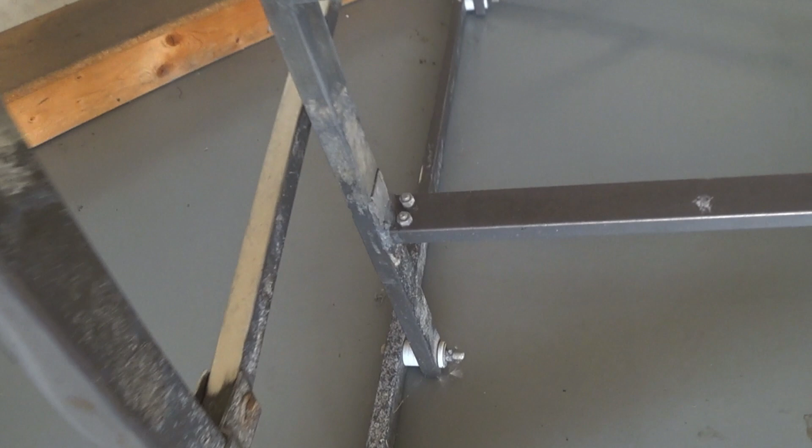Gonna change gears in this video a little bit and talk about this jet ski lift. So this is a jet ski lift that I've had for quite a while, and during a storm, pretty bad storm, part of the lift got broken. And so if we look down here, you can see that outside bracket is gone, and what it should look like,

that bracket down there. And so I have a couple of the brackets here that I took off the other part of the jet ski lift. And this is what I am looking to replace. So that would kind of go like that to capture around the post. And then each of the cross members comes in and captures into the bracket to be held.

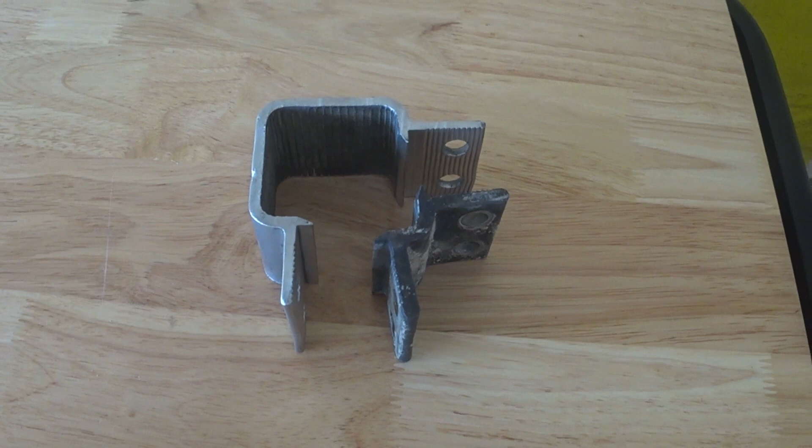And this is an aluminum extrusion that the manufacturer used to make, and they don't make it anymore. The easiest thing would be just to go to some vendor and say I want 2 of these and be done with it. But they don't make it anymore, and so my options are either say the heck with this jet ski lift or figure out how to do it myself.

And as I was going and finding they didn't make these anymore, I thought, what am I going to do? And then I remembered, hey, I've got Fusion 360 and I also know how to design things. So I'm going to make these brackets out of sheet metal parts, and I'm going to use a company down in Wilson, North Carolina called Barnes Metal Crafters. I've known Nick there for quite some time, and so I sent a rough idea for this over to him, and he threw me back a price pretty quick.

And I think he's also going to show us the process of forming these up when I send them down to him. So with that being said, let's hop over into Fusion 360 and see how I can make a set of replacement brackets out of sheet metal instead of aluminum extrusion.

I'm in Fusion 360 and I'm going to get ready to replicate some of the core components of the jet ski lift so we can fabricate the brackets. The first thing I want to do is save my design, so I'm going to go ahead and hit save. I've already created a project called Jet Ski Lift Bracket, so I'm just going to give this design a name called Lift Brackets, and I will hit save. Now we're in an autosave sequence, and Fusion's going to autosave the work that we're doing, so if we crash or make a mistake, we can always go back.

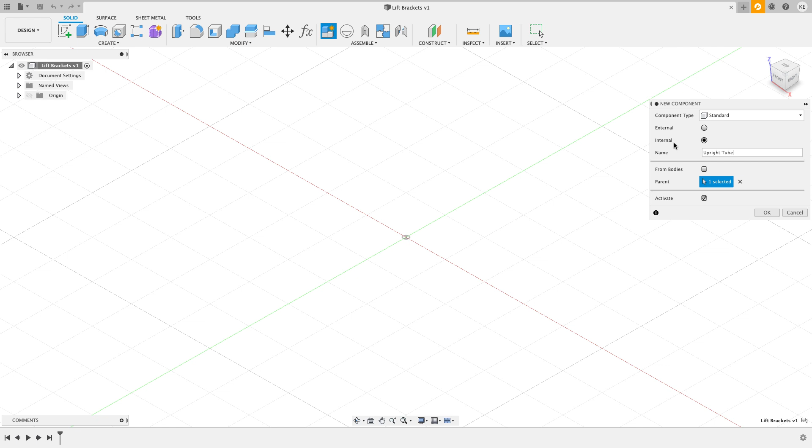hit OK. I don't have any geometry drawn, but I know that this is going to be the core piece of my design, and I don't want this to move around at all. So even though I don't have any geometry, doesn't mean that I can't create a joint. I'm going to go to the Assemble menu, and I'm going to choose an as-built joint between the upright tube component and the origin. And you'll kind of see it shake there. That's letting me know that whatever I draw, it won't be allowed to move. So I'll hit OK.

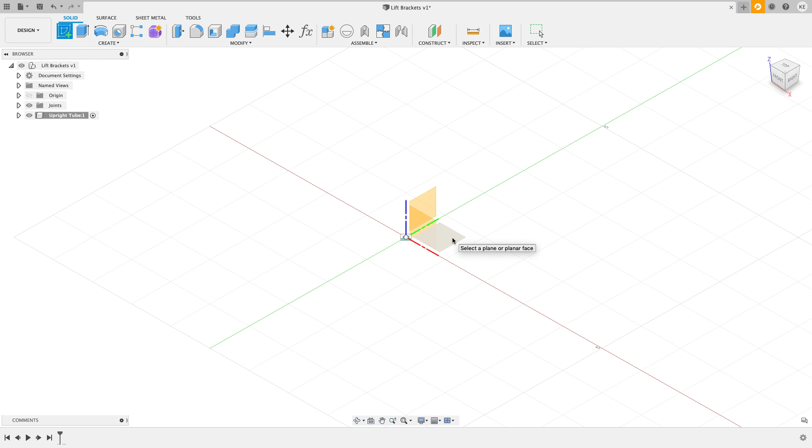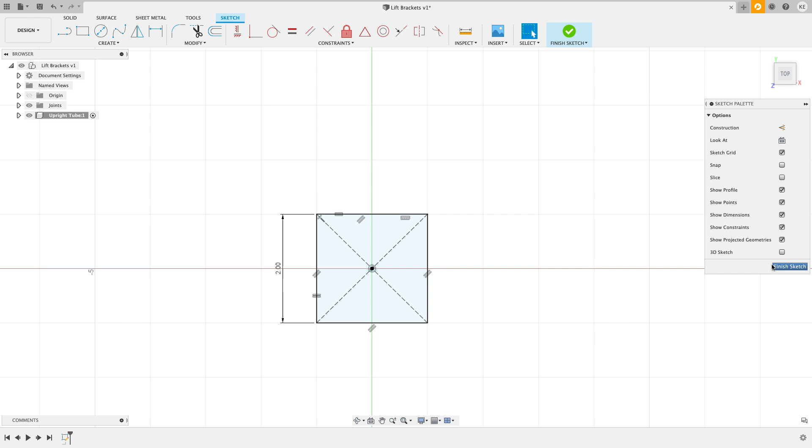And now I want to draw my rectangular tube. So I'm going to create a sketch on the top plane. And from the create menu, I'm going to use the center rectangle option. I'm going to start from the origin. And I know this is going to be 2 by 2, so I could hit tab 2. But instead, I'm going to just dimension one of the sides and then set both sides to be equal. And that will turn it equal, and I'll have a square that's 2 inches by 2 inches. I'm not going to fillet anything or do anything like that.

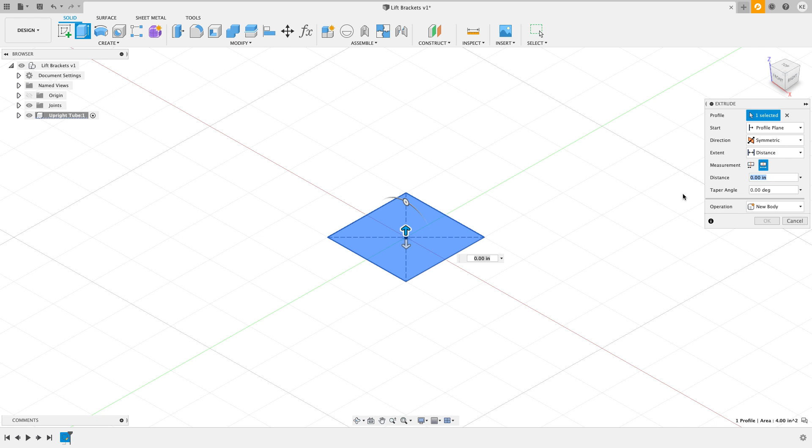I'm just going to go ahead and finish my sketch. And I want to extrude this out. When I extrude this, I could go straight up with it, but I think in my case, it might be easier to go a symmetric direction with it, and you'll see why I might do that as we go. So I'm going to choose symmetric. I want the whole distance, and let's just say this entire chunk is going to be 4 inches in length.

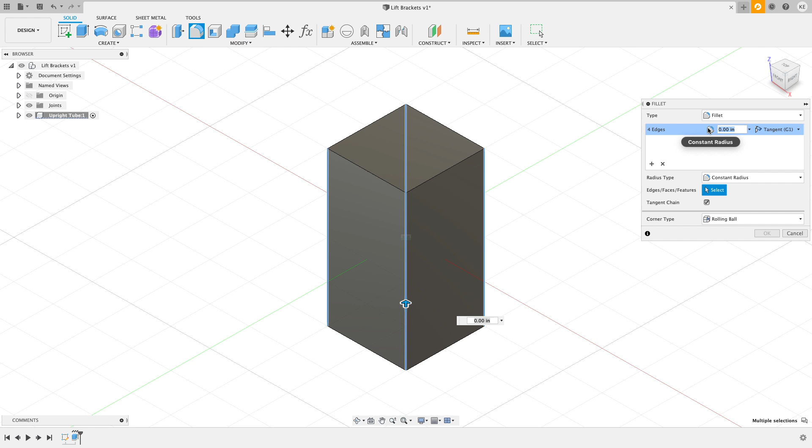And I'll hit OK. I know from measuring that the radius of this tubing is 1/4 inch, so I'm going to fillet those now. So I'm going to go ahead and grab the edges. Notice you can pick the edges through the model if you can kind of get your mouse over the top of them. And I'm going to set that fillet radius to 1/4 inch and hit OK.

And the last step I want to do with this tubing is turn it into tubing by using the shell command. I'm going to click on the top face and the bottom face, and I'm going to give it a thickness of 0.095 inches, and I'll hit OK. And there's my first component that I want to design.

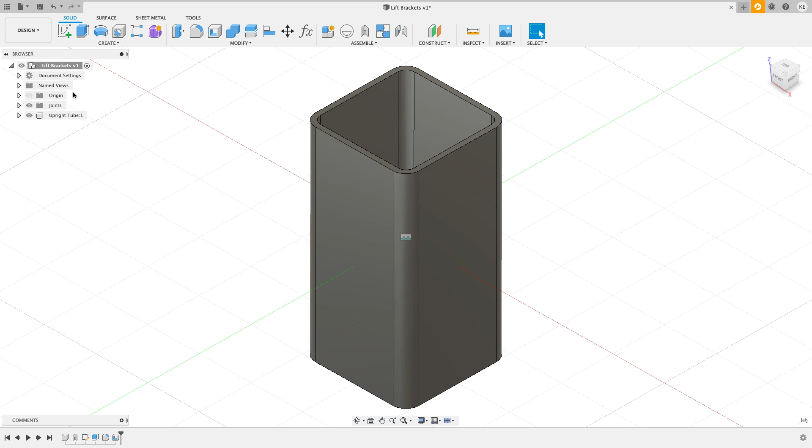If I activate my top level design, I can click on this. I can't move it because an as-built joint has been created between the tube and the origin, so it can't move. I want to create another component, so I'm going to shut off this upright tube for now, and I'm going to say new component. So same thing again, I'm just going to call this a cross tube. Again, this is just going to be a standard component, and I'll hit OK.

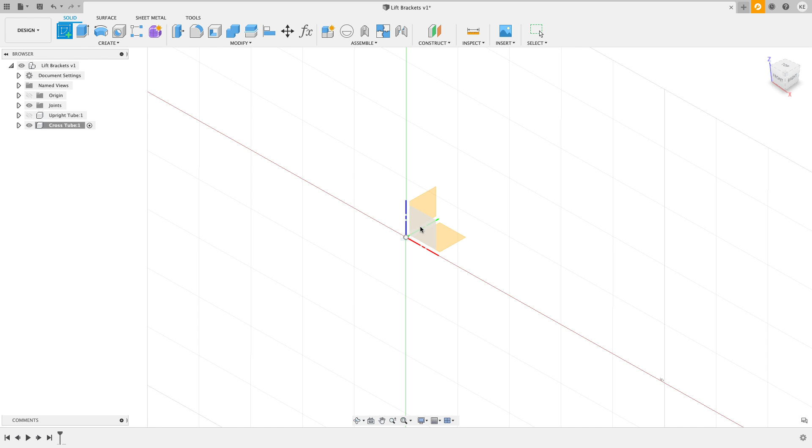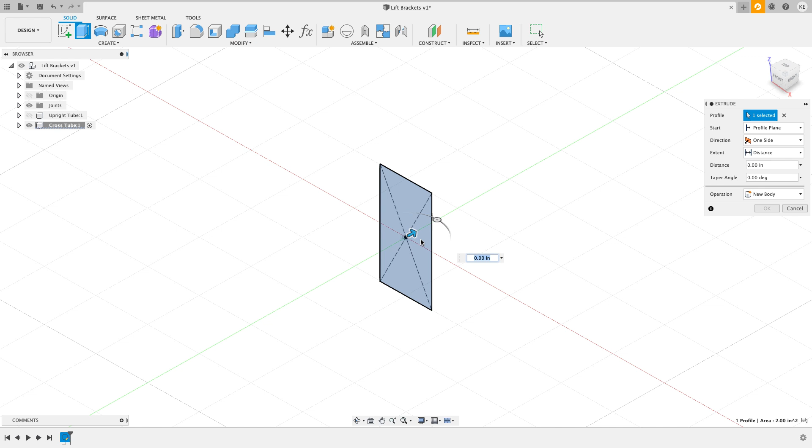And I'm again going to sketch on the origin using the rectangle command again, center rectangle. I'm just going to snap to the origin and drag up and out. In this case, it's going to be 2 inches tall, but only 1 inch wide. And I'll finish that sketch. I don't really know what the radius is on this piece of tubing, and I don't really care. So I'm just gonna extrude this some distance. Let's go 3 inches, should be enough in this case.

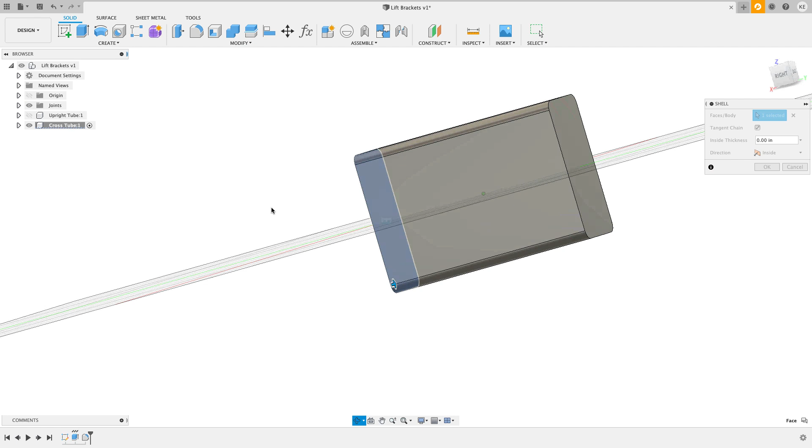And I'm gonna repeat the same process again. I'm gonna fillet the different edges here. And let's use a fillet radius on this one of 0.125. And I'll hit OK. And I'm gonna shell this again. Same thickness, 0.095 as my last piece of tubing, and there's my second piece of tubing there.

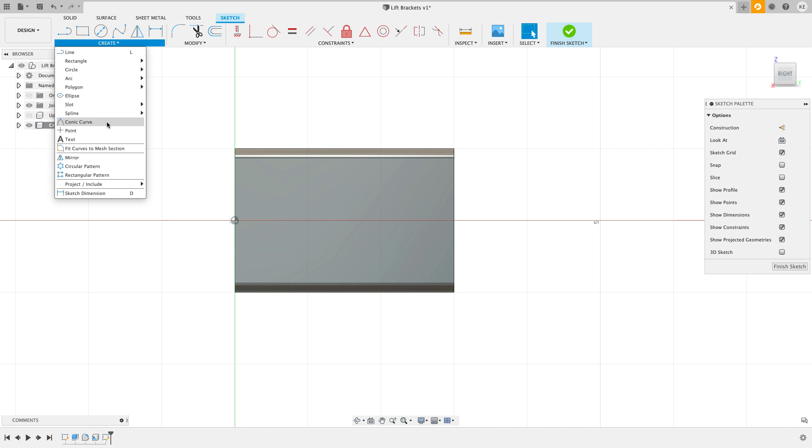Now I also know on this part that there's a couple of holes punched in here, so I'm going to go ahead and put a sketch on that face and sketch in a couple of points. I'm going to drop in a point, if it'll let me grab it, right there, and a point right there. I know that these points are an equal distance away from the center line of the part.

And so I'm going to project in this part's x-axis. So I'm just going to come down here. I guess it's going to be the y-axis, and I'll do it as construction. So I'll click on the y-axis, and I'll hit OK. Now, why did I project in the axis line instead of just drawing a line from the origin? I like to use work geometry whenever I can because you can't delete, change, modify, flip, anything like that with work geometry. So it's a super stable geometry to work from.

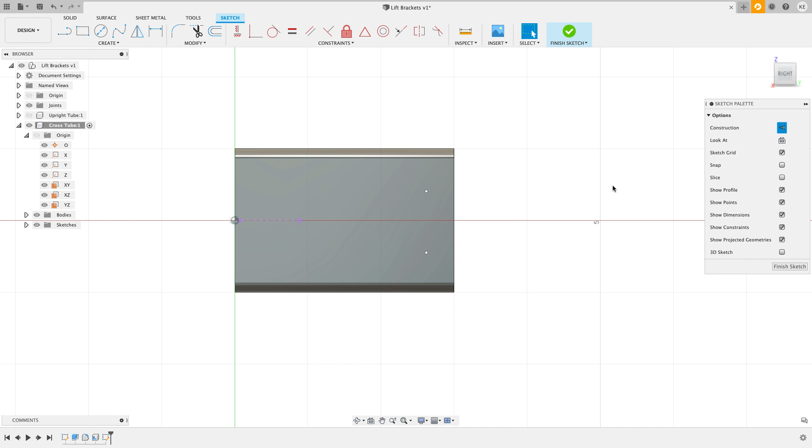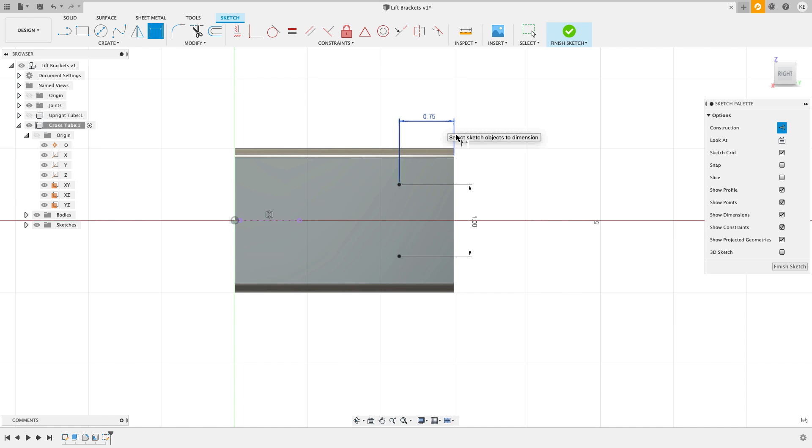Now that I have that in there, I'm going to go ahead and use the symmetry constraint between this point and click on this line. And now you can see that they're lined up and they're an equal distance away from each other. So I'm going to dimension between these 2 points, and I measured this to be 1 inch. And I also know that between the edge and this point, it's going to be 0.75 inches. And I'll hit OK, and I'm going to finish the sketch.

These are through holes that a bolt goes through. So rather than drawing the circle, I'm going to use the hole command. So we'll use hole, click on the point, and for the distance, I'm going to say I want to go all the way through. And now I could just set the clearance size for a 3/8 inch bolt, but I want Fusion to do the heavy lifting for me.

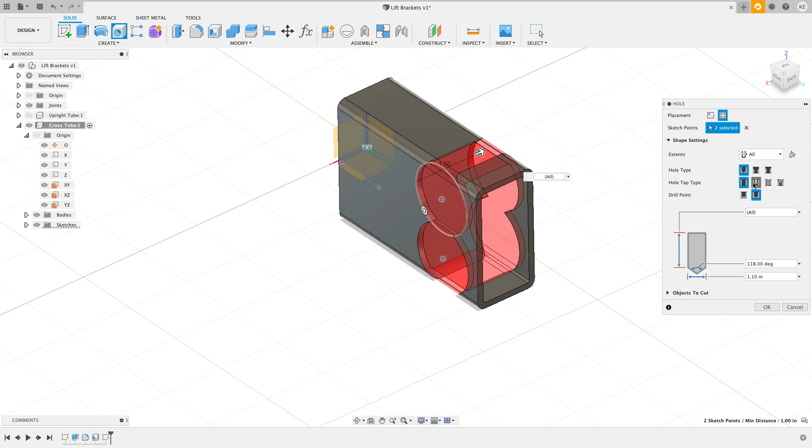So under the hole tap type, I'm going to say that I want a clearance hole, and I'm going to tell Fusion the type of fastener that goes through there. So I'm going to say ANSI unified screw. I'm going to say that this is a hex head bolt, and its nominal diameter is 3/8 of an inch. And when I do that, Fusion figures out what that size is, and I'll hit OK. And now I have my cross member component created.

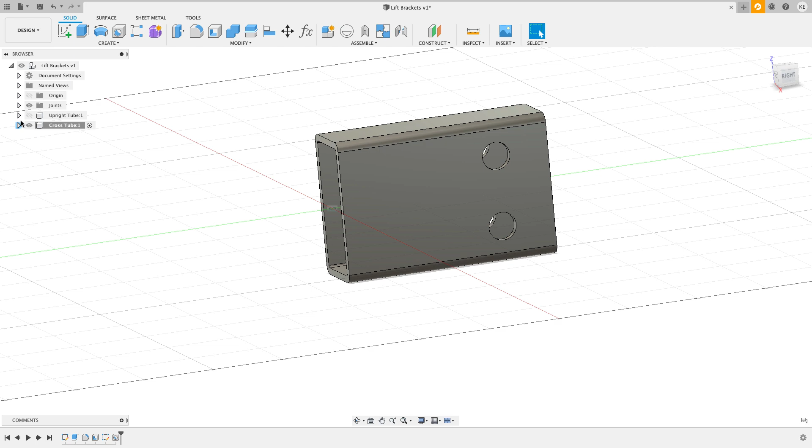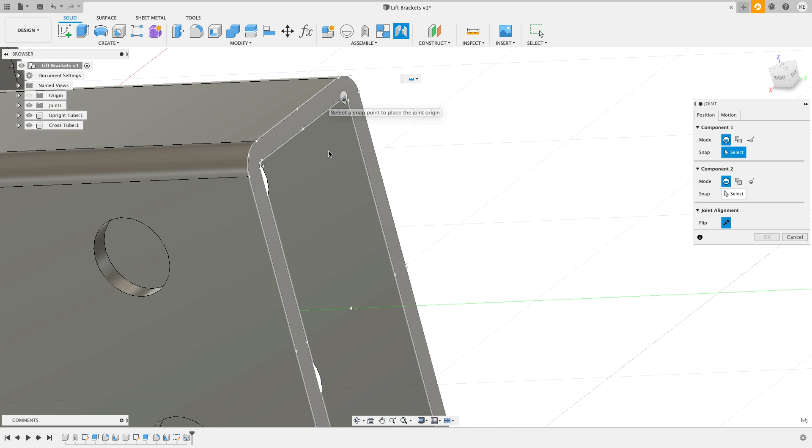I'll turn my upright tube back on, and I guess I'll activate the top level design. And now let's assemble this part. So I'm just going to go and do a joint. I'm going to hover over this face. Now, as I try to get to the center point, you can see when I put my mouse over there, I can see it, but as soon as I try to get there, it goes away. If I hold Control down on Windows or Command down on Mac, it locks those selections in so I can get to it. So I'm going to go choose that option right there, that little center dot, and I want to put that at the center right there. And Fusion's going to put that into place with the rigid joint.

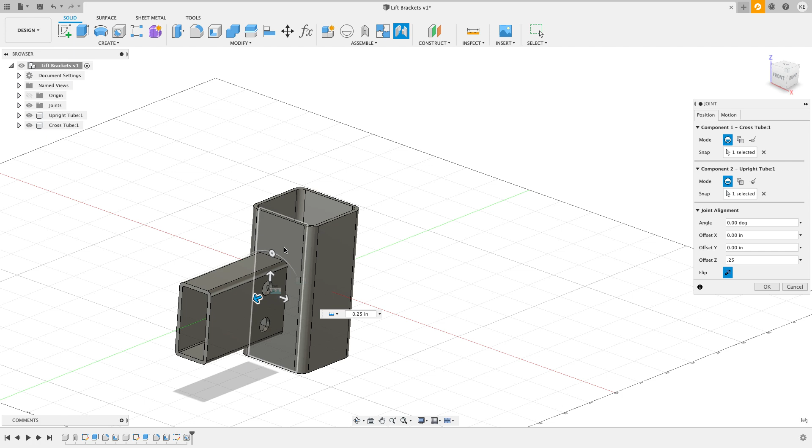However, I want a 1/4 inch gap. The way that this part is designed, the real life jet ski lift, there's about a 1/4 inch gap. So from this front face to the center of those holes is 1 inch. And I'll hit OK. And now I have that aluminum cross member put in place.

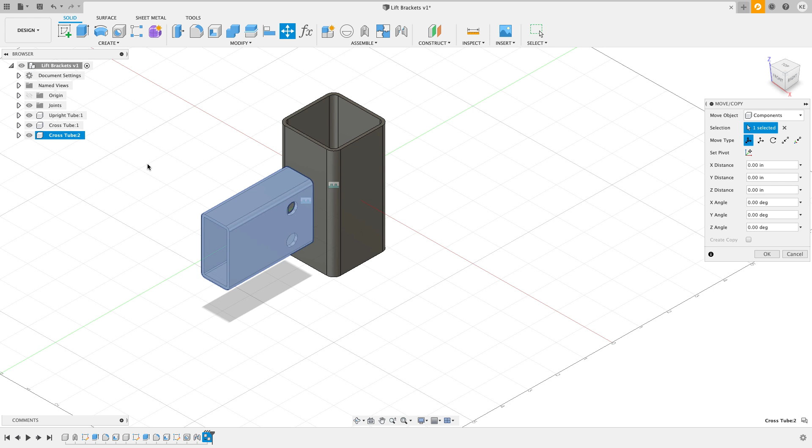I need another one over on this side. So I'm going to right click on this component name and say copy. Right click on my design and then say paste, and it's going to paste a second one in. And I've got some move options. So I'll just kind of move this guy and rotate it back 90 degrees. Wouldn't be necessary. It'll just make my life a little bit easier.

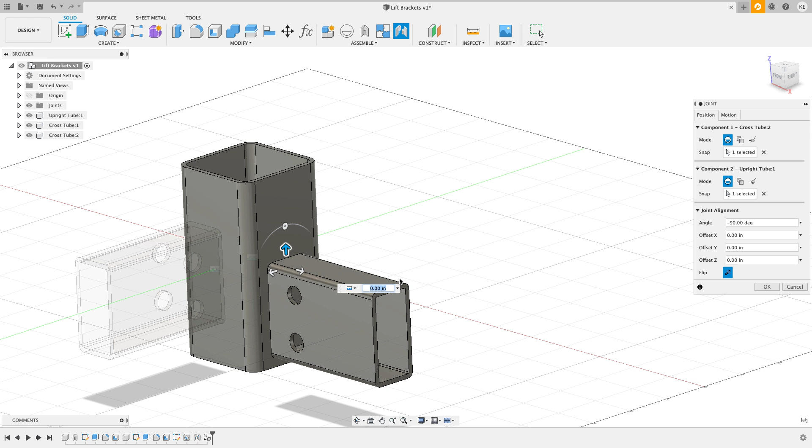And now that I've got that placed, I'll just do a joint, put my mouse on that face, hold the Control or Command button down, and then select that point and align it up with that point right there. And again, I'm going to offset this a 1/4 inch, so 0.25, and hit OK.

So now I've got the structure of my design done for what I need to do. I've got my upright tube, my cross tube 1, and my cross tube 2. So this would match the geometry that's out on the jet ski lift. And I'm ready to go and make my brackets, almost. One thing, sometimes these joint symbols can get a little annoying to look at, so I'll just hit the eye here to shut those off for a minute.

And I know that I want to make some sheet metal components, but I have to make sure that I have the right sheet metal rule in place. So I don't have that rule. I'm gonna go to the sheet metal and go to modify and sheet metal rules. And I'm gonna find a rule that I wanna start with. In this case, I'm gonna use the aluminum inch. I'm gonna right click on it and say new rule. And it's gonna start with a copy of the rule that I started from. So I could call this 1/8 inch aluminum, however you wanna name it. I know a popular way to do this is to use gauge thicknesses, things like that.

So for my thickness, this is going to be 0.125. And the K factor, I talked with the company that's going to make this for me, and the K factor that they use for this is going to be 0.33. So I'm going to type in 0.33. And what the K factor is, if I took a piece of flat sheet metal and bent it, there's a plane somewhere between the inside face and the center line where, when you bend the material, that plane neither compresses nor stretches. It's the neutral line. So the ratio between those two is the K factor. This is what allows you to fold up sheet metal and get a very accurate result.

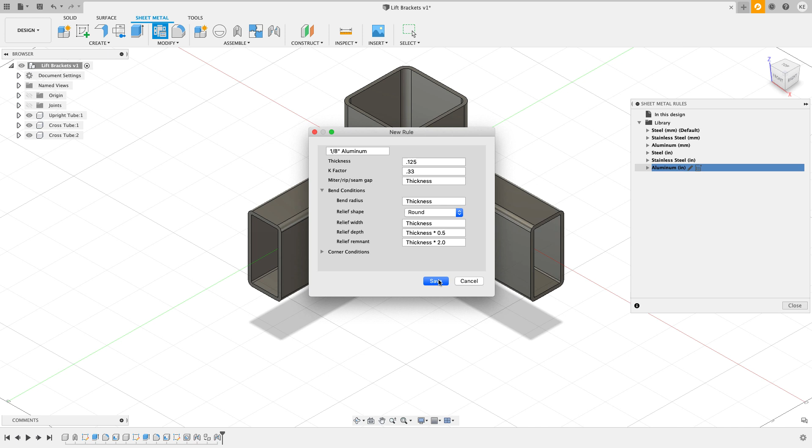So in this case, my rule is now good to go for what I want to do. So I'm going to save that rule. Now you see in my list of sheet metal rules, I've got 1/8 inch aluminum. So I'm going to go ahead and close this.

Now what I want to do is make my outer bracket. So I'll right click and say new component. And this time Fusion's picked up that I want a sheet metal component because I'm on the sheet metal tab. Otherwise I would just hit the drop down and choose what I want. And I'm going to say that I want to use that 1/8 inch aluminum rule for this. And I'm going to rename this component to be outer bracket.

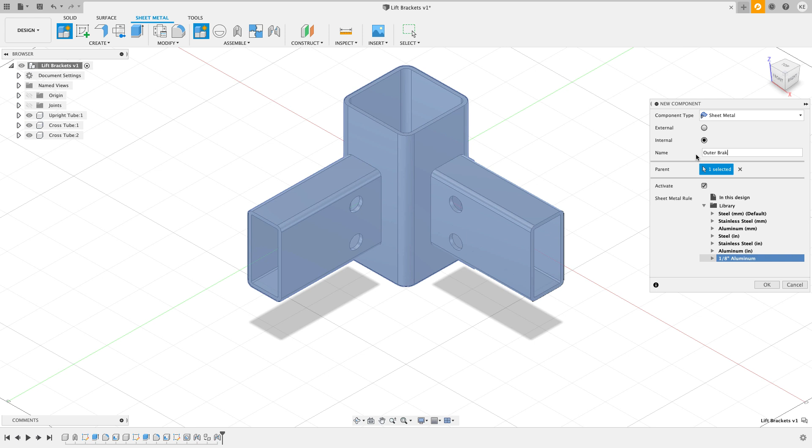And hit OK. And now you can see that all my parts ghost out and I'm working in the outer bracket. To design this bracket, I'm going to use a modeling technique called top-down modeling, where I'm going to use the geometry that's existing on the screen to design the geometry around my part.

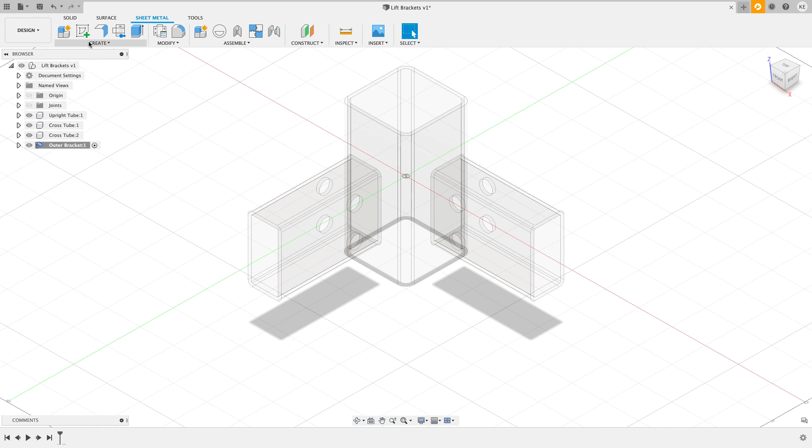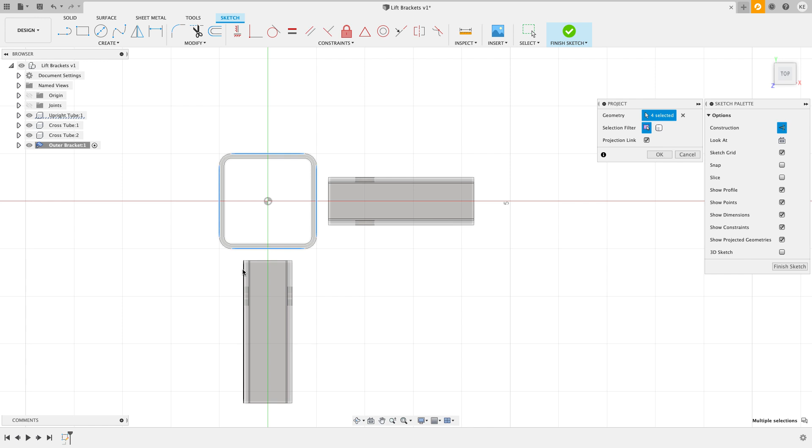So I want to create a sketch and I'm going to put it on this top plane up here. And I want to project in some of the edges that I'm going to need to work with. I want to do that as construction, and then I'm going to hit P for project. And I'm going to click on this edge, this edge, this edge, and that edge. I also want to project in that outside edge there and that outside edge right there. And then I'm going to hit OK.

And now I have those edges of my design projected. If I were to shut off some of these, you'll see that we're just projecting in the edges of those members, because I want to use that to design my piece of sheet metal. Now in some of the places I'm going to be exactly on the faces, and then I'm going to put a little bit of a gap in here.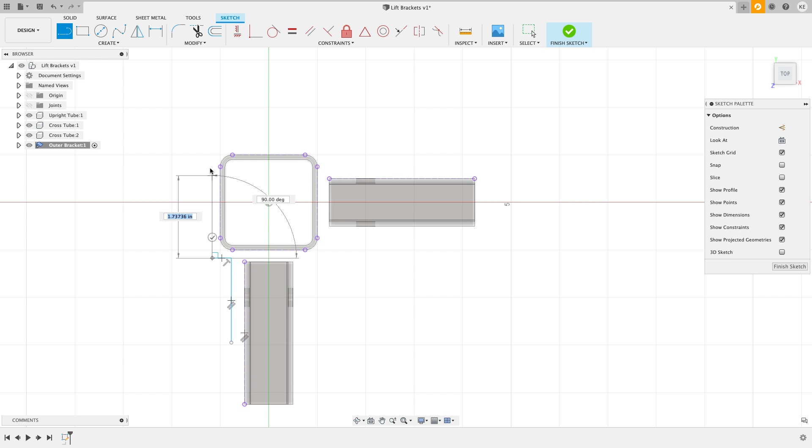So when I draw my sheet metal profile, I'm going to turn my construction off, and then I'm just going to come down here and draw like this and come up and come over. I'm not being super careful right now, and I'll come down and come across. So there is going to be my sheet metal design. I know that this leg and this leg are going to be equal at some point.

And I can also add some other constraints. I'm going to use a collinear constraint between here and this line, and between here and this projected line. So that sets me up that way. I'm also going to do it for here and here, and for here and here.

Now for the legs that are just kind of hanging out in space, I want to leave a little bit of a gap in case everything doesn't line up exactly. As long as I can get a bolt through it, I can tighten everything down and get it to squish in. So I'm going to do a dimension between this edge and this edge, and I'm going to set that gap to be 0.0625 or 1/16 of an inch. And then I'm going to set the same gap over here.

Instead of typing that in, I'm going to reference in this first dimension. And probably what would have been a smarter thing for me to do would have been to create a design parameter called gap that I could have referred both of these dimensions to and changed it from the Modify, Change Parameters menu. But this is a pretty simple design, so this will work.

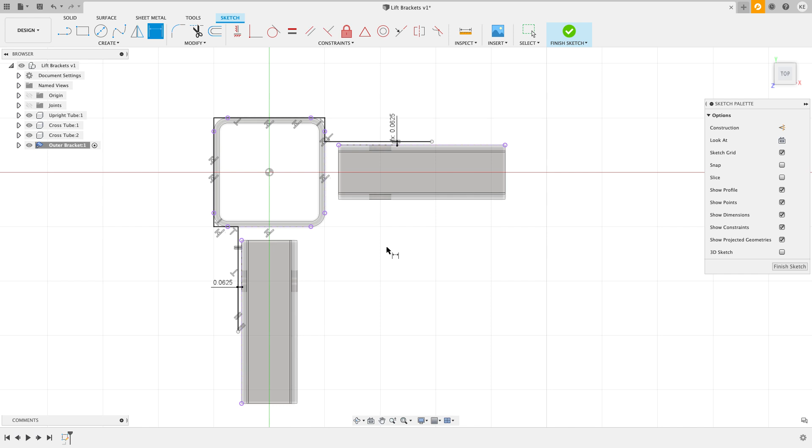I'm almost all black and fully constrained, but the only thing left is I'll set this dimension to be, let's go 1.5 inches for this length. And so now everything turns black and is fully defined. And now it's time to turn this into a sheet metal component.

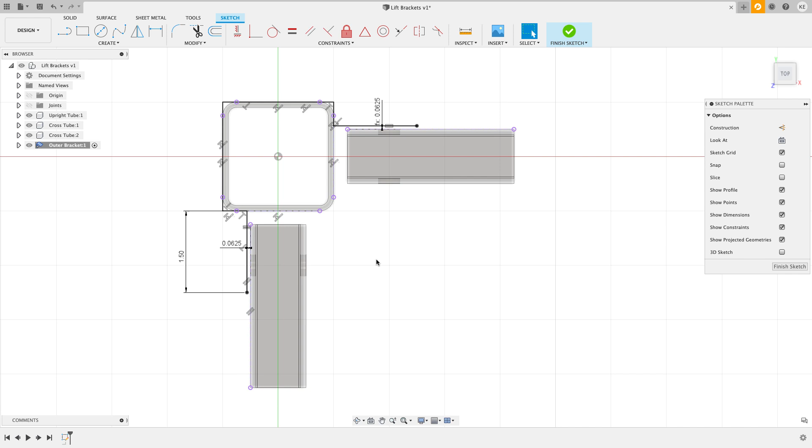So I'm going to finish my sketch, and then I'm going to use the flange command and click on this edge. Now I'm not going to see anything happen until I give it a thickness. And when I give it a thickness, I'll see that it starts to show my sheet metal thickness. And with this, I want to make sure that my design stays on the outside of the line. I also have the ability to go on the inside or to split the line using symmetric.

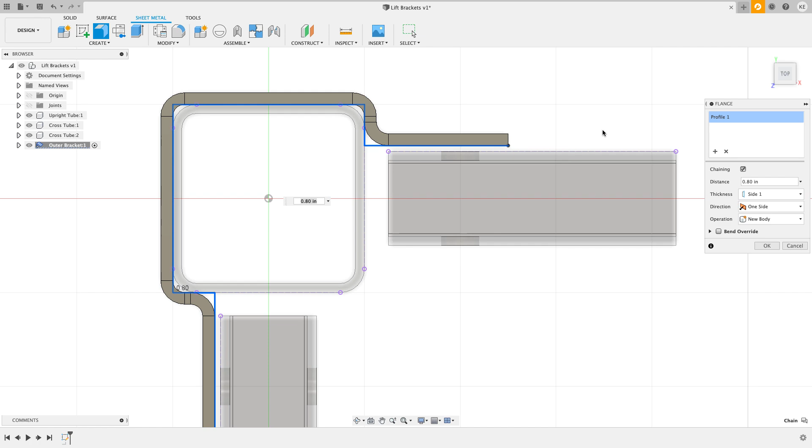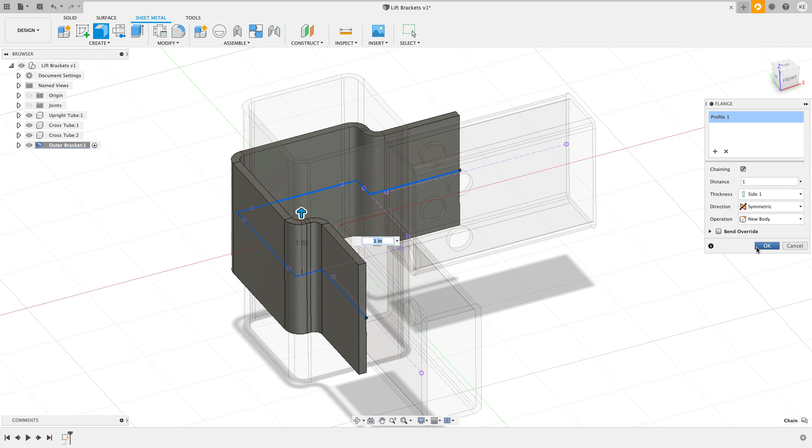I want to go to side 1 so that my design is on the outside of the tubes I'm working with. I'm also going to do this symmetrically. Right now it's going one direction, so I'll say symmetric. Things work a bit differently in sheet metal currently—instead of entering the half or whole width, the only option is the whole width. I'll enter 1 inch, which gives me a 1-inch overall height. That's good, so I'll say okay.

And there is my sheet metal outer bracket, the main part of it. I have some holes that I need to punch through here, so let's go ahead and make those.

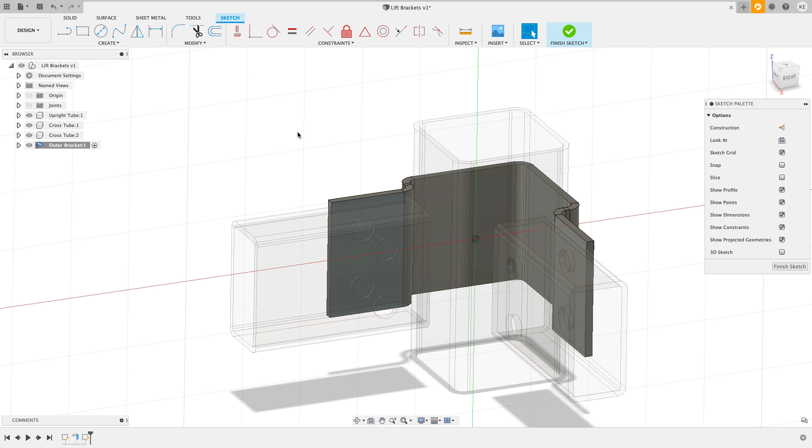I'm going to put a sketch on this face, and I already have the hole locations, so instead of redoing those, I'll turn on construction and hit P for project. I can project in that edge and that edge of the circle, then choose okay. Now that I have that done, I could even shut off my cross tubes—I don't need to see those anymore.

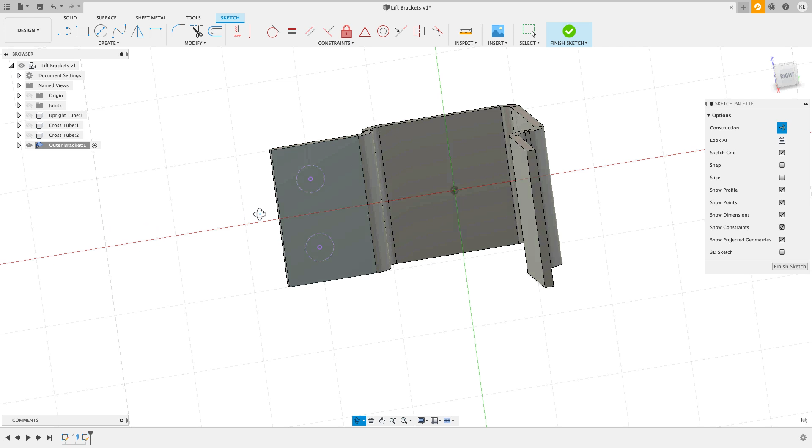I can shut off my upright tube too if I wanted to, because now I'm just going to draw in a slot shape. I'll turn my construction back off, and now I want to do a center point slot. I'll lock it to that origin spot, drag it out a little bit, and drag this up.

Now, I don't know exactly how tall I want to make this. I want it as tall as the circle is, so I can use the coincident constraint to go from here to the circle. I'll have to use tangent on this one, from this line to the circle, and then set my total overall distance.

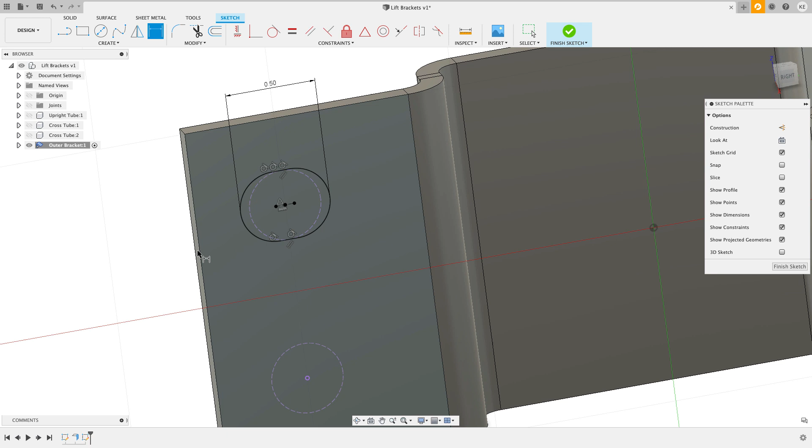I want to dimension the outside to outside of this, so I'll right click and say pick circle arctangent, click on that quadrant and come up here, and let's call this maybe 0.5 inches. That's probably enough—I just want a little slop in here in case the hole isn't perfect or the bends aren't perfect, so I can get that lined up.

I could either pattern this down as a solid, or I'm just going to draw this over again. Oftentimes I like to do a pattern or a mirror, but in this case I'll just draw it one more time—another center point slot, dragging this out and up.

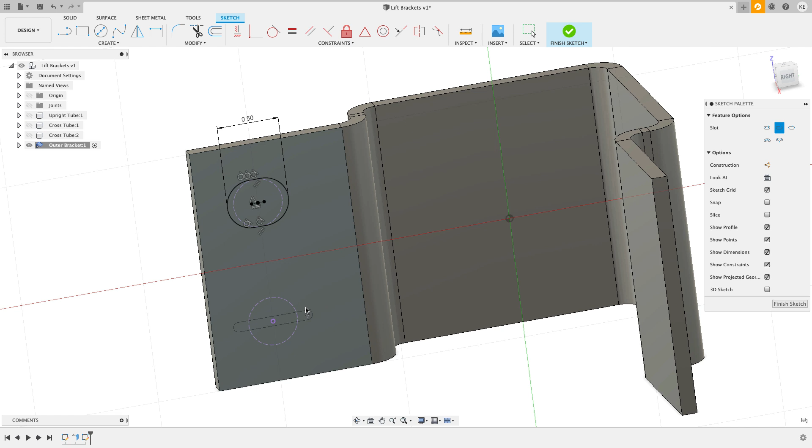Now I don't really even have to dimension anything—I'm going to use constraints for all the rest of this. I'll say equal between here, and then equal between this edge, and that should make these both the exact same size.

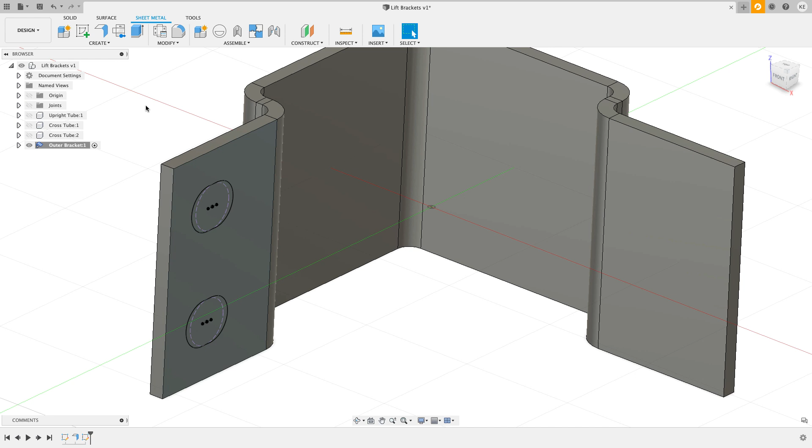I'll finish my sketch, and then I can extrude that region and that region. I'll choose the direction I want it to go, and for the distance, I know I always want these to go all the way through, so I'll hit OK.

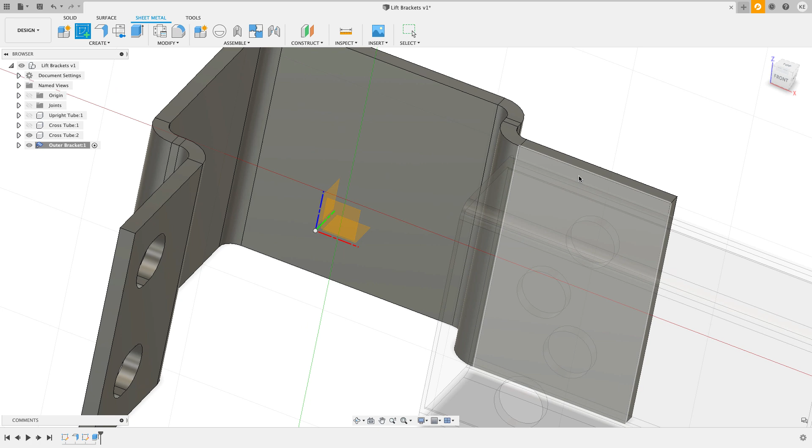Now I need to get those same holes over on that side of those slots, so I'll turn on that upright tube and put a sketch on that face. I'll hit P for project as construction, just like before. Click on the 2 holes—I missed the second one. Click on that edge and hit OK.

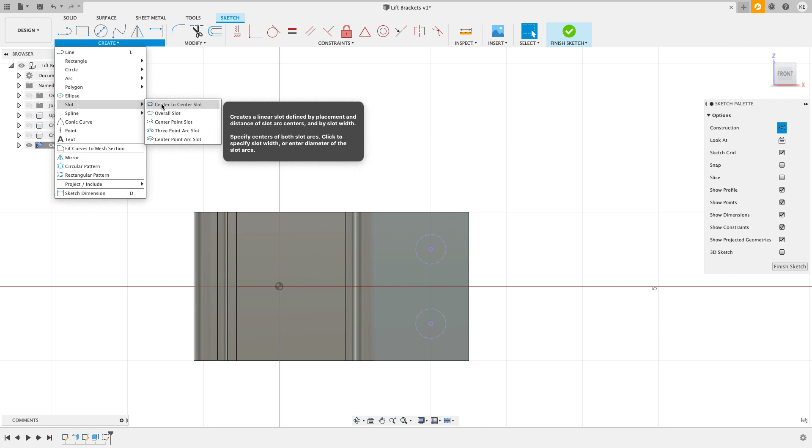Now I can shut off that tube, and we'll just go ahead and sketch it one more time—slot, center to center slot. If I would have paid attention to the dimension, I want to make sure I'm not on construction. I could have just referenced that last dimension that I used, but I did the wrong one there.

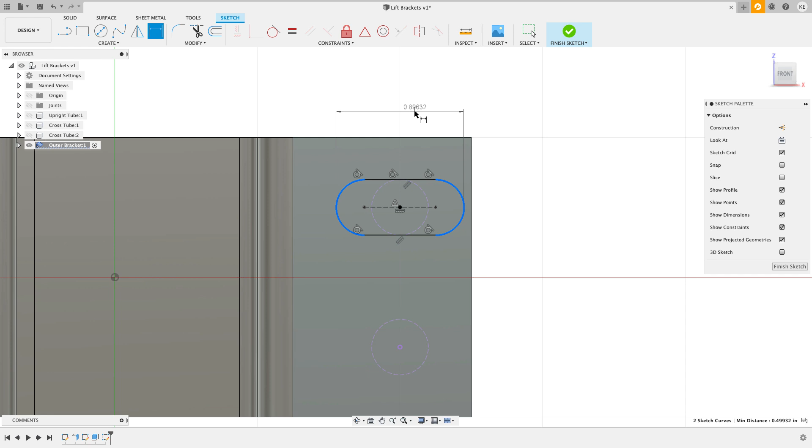So I'm going to come back to slot, center point slot, click on the center, drag out, drag that up, and say tangent between that and that. Then from the quadrant to the quadrant, again, is going to be 0.5 inches. One last slot to go.

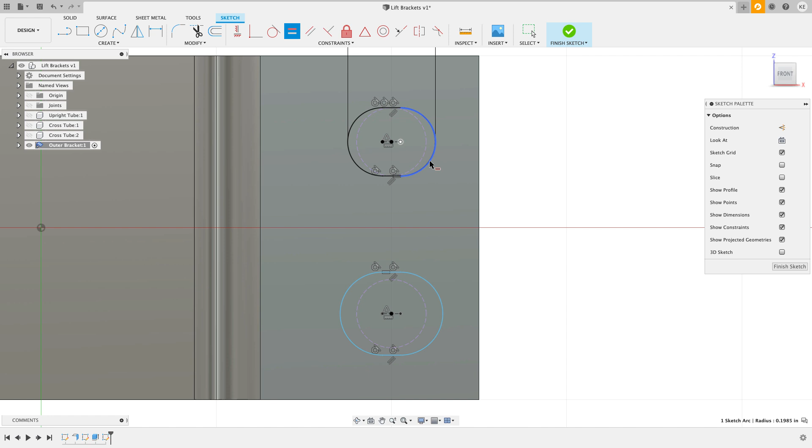From the center point slot, come out and come up. On this one we can use the equal constraint between those two edges, and then from this arc and that arc, that'll make my circles the same. I'll finish my sketch, and now I'm going to extrude out this region and this region, pulling my arrow the way I want it to go.

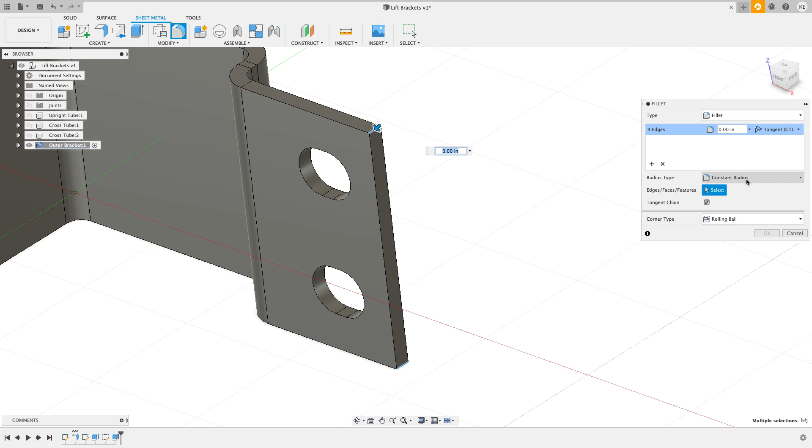For my distance, I'm going to say all, hit OK. The last thing I want to do on this bracket is add some fillets. So I'll use the fillet command and click on that edge right there, and that edge right there. For the fillet radius, I'll give this a quarter inch radius just to round it over decently.

I'll hit OK. Now if I turn on my other components, you'll see that sheet metal bracket fits exactly around it. All the holes line up. I've got a little bit of slop factor there to make sure I can get my bolt through. So I'm pretty happy with that.

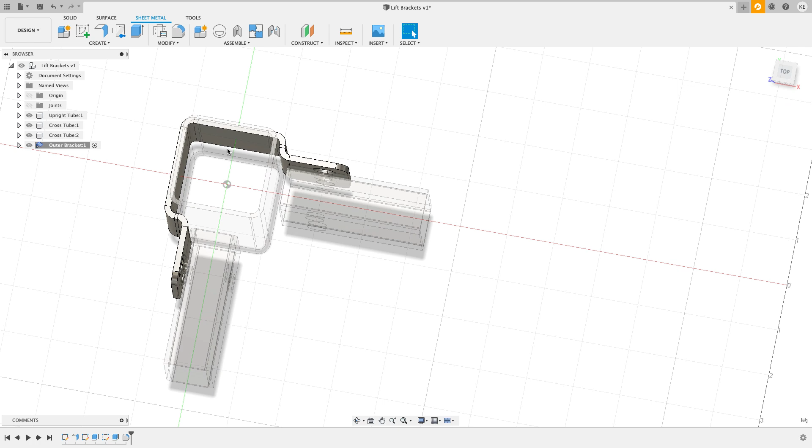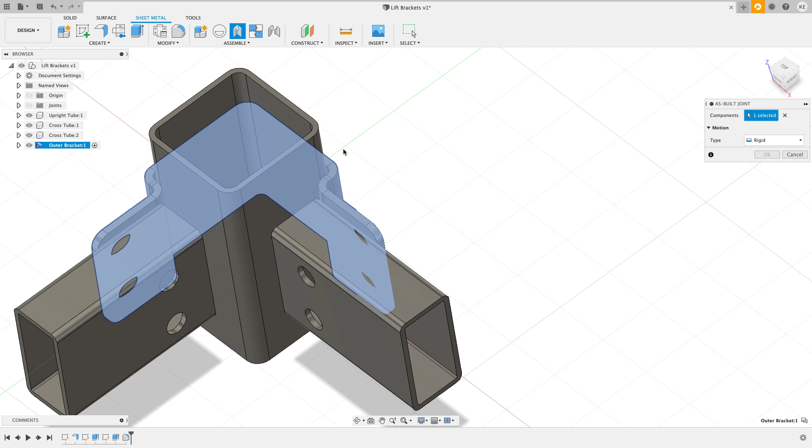If I'm not careful though, one thing I haven't done is I can click on this bracket and move it anywhere I want it to go. It's in place right where I want it to be. So rather than adding a joint, I'm going to do an as-built joint because it's located right where I want it to be. I'll choose as-built joint between the bracket, and I can pretty much choose any component I want.

I'll use the upright tube in this case, and it's going to be a rigid joint, and now I can't move that around anywhere. I can activate my top level design, and there we can see I've got my outside bracket ready to go. A little bit of a gap there.

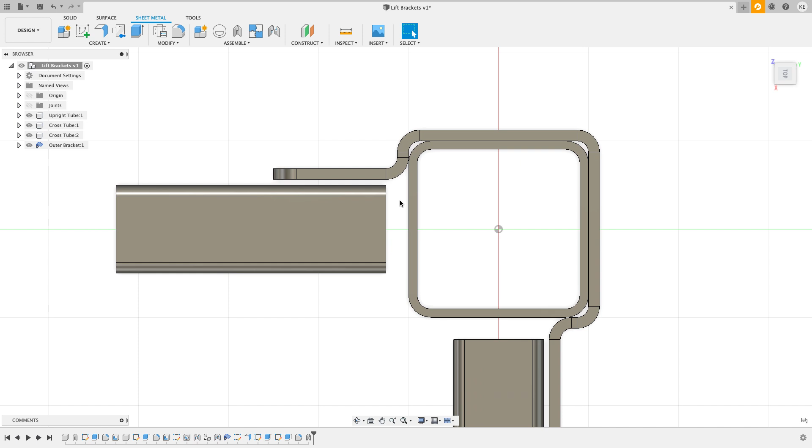Sometimes in CAD things look a lot bigger than they are. That's only a 1/16 of an inch, so it's not really that big of a gap. We can repeat the process to do the inner bracket.

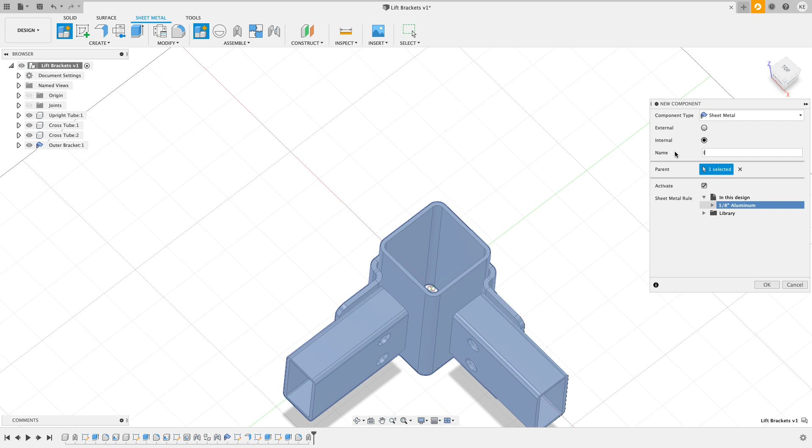So I'm going to right click and say new component. It's going to be sheet metal. It's already chosen the design rule that I've used in this design. I'll call this inner bracket, and I'll hit OK. Then we'll just repeat the process again.

So I'm going to put a sketch up on this top plane, and I'm going to do P for project. I need to project in some geometry. I'm going to project in this edge and this edge this time, and I want this outer edge and that outer edge. I can hit OK.

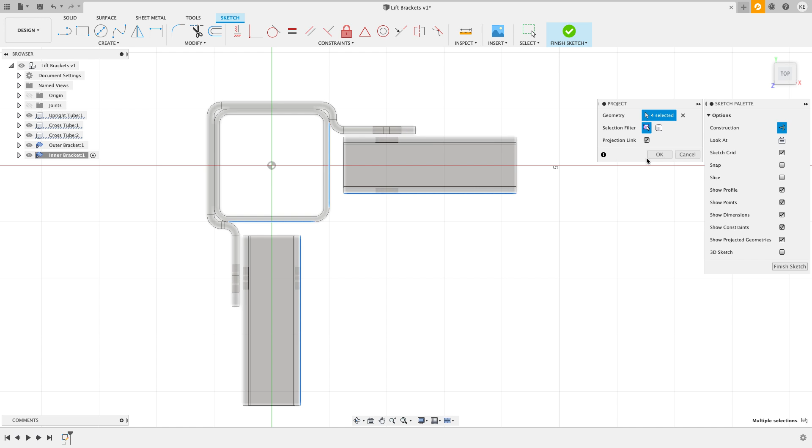I'm going to turn my projection off, and now it's just going to be the same thing. So I'm going to draw a line up, over, up, and over. I don't know how long this is. I could dimension it, but I know I want it to be as long as the other bracket. So I should have projected in a couple more things.

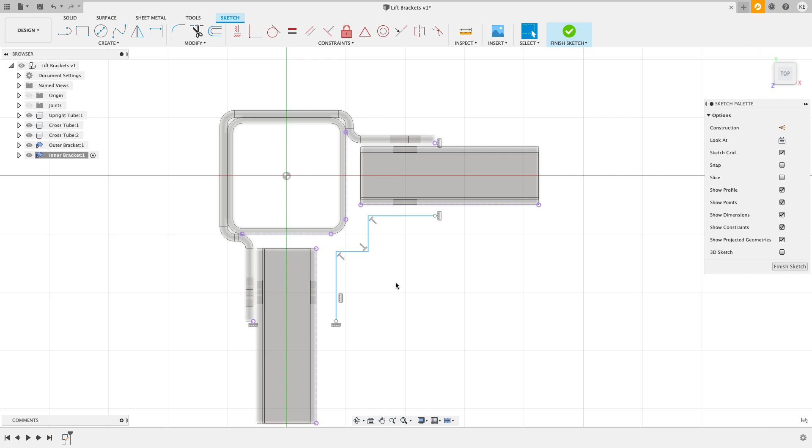I'm going to do P for project one more time. I'm going to click on that endpoint, and I'm going to click on that endpoint right there and hit OK. Now I know the length is going to be vertically located between that endpoint and horizontally located between those two endpoints. Now I've got that set.

I'm going to give this a collinear constraint, I should say, between there and there, and we'll say that those two are collinear. Then now I'm just going to go and dimension this. Again, if I would have made a master parameter, it would have been easier on myself, 0.0625 to get my gap dimension. And I'll dimension from there to there.

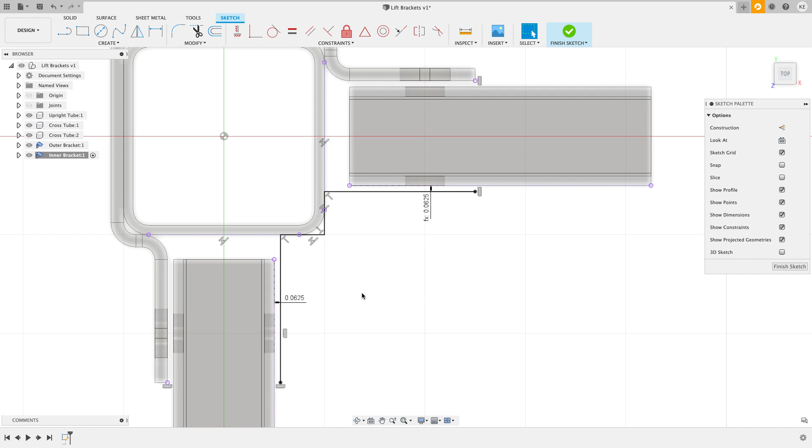And I'll set that equal to the first one. Now you see that my inner bracket is good to go. So I'm going to finish my sketch, and now I can use my flange command.

Let's pull this up to make sure that fusion is on the right side of the design in this case. And you can see it is not, it's cutting into my tube. So I need side 2, so that looks good.

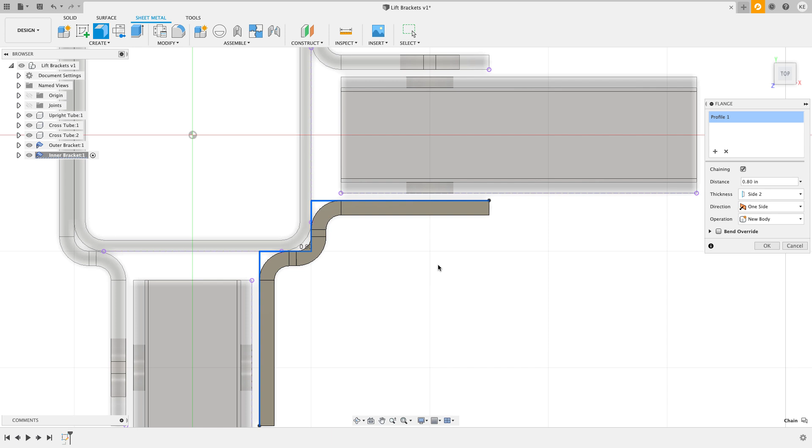And I'm going to say symmetric, and again, it's going to be 1 inch to be the same height. Now I could have extruded to the other face - lots of different ways I could have made that bracket right there. So I'm going to go ahead and hit OK.

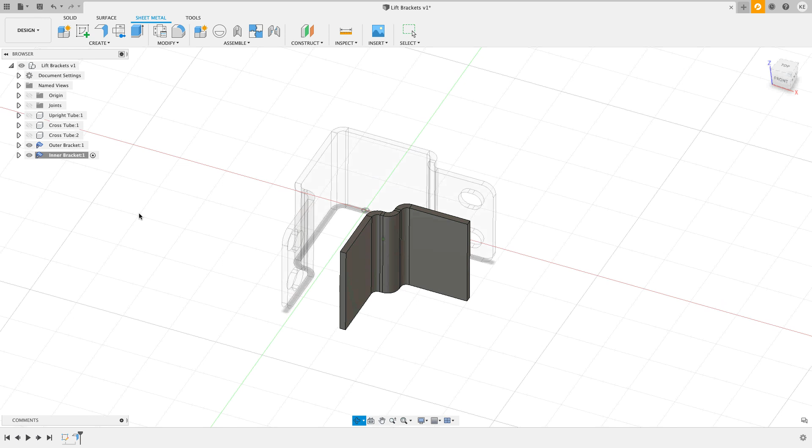I'm going to turn off these other components. Now what I can do is I can reference the other slots on the bracket. So I'm going to create a sketch on this face, and now I'm going to do P for project. I'm just going to click on the different edges that I want to participate in this slot.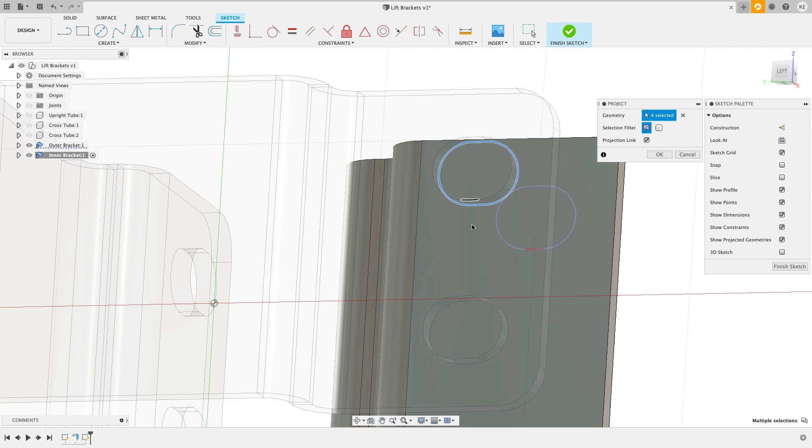So it really wouldn't matter which edges I'm using here. So there's one of the slots I want, and then here I'll just go grab those four. I'll hit OK and finish my sketch.

Now I'm going to extrude that region and that region. Pull it through. The distance is going to be all. And hit OK, and there's that.

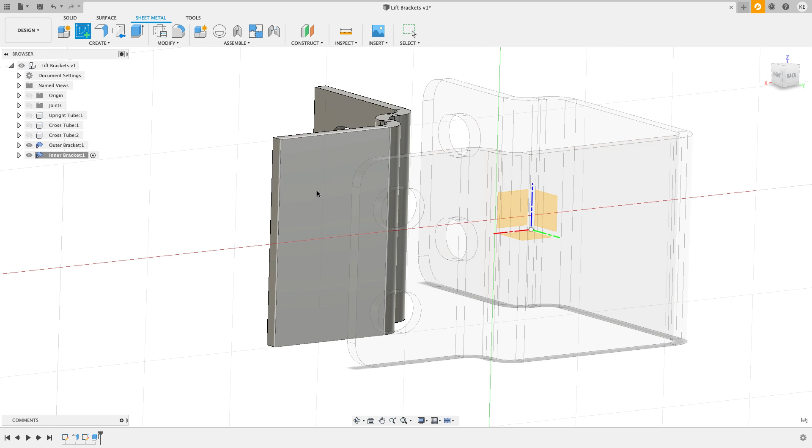Now let's go and put a sketch on this face, and again we're going to do P for project. I'm going to click just the geometry that I want to project and hit OK there, and I'll do P for project one more time. I could have done them all in one shot, but I split it up into two, and I'll hit OK.

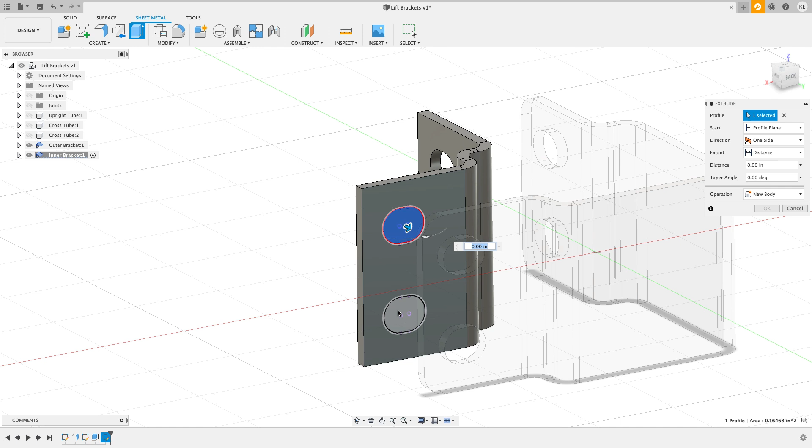Rotate around a little bit. I can finish my sketch and do my extrude and click on this face and this face, pull it through a distance of all, and I'll hit OK.

Last thing I'm going to do is just do the fillet command. Click on wrong edge, so I'm just going to X that edge out, grab that edge, and that edge, and I want that top edge, and I'm just going to rotate around and grab this last edge and hit 0.25, and that's all filleted out.

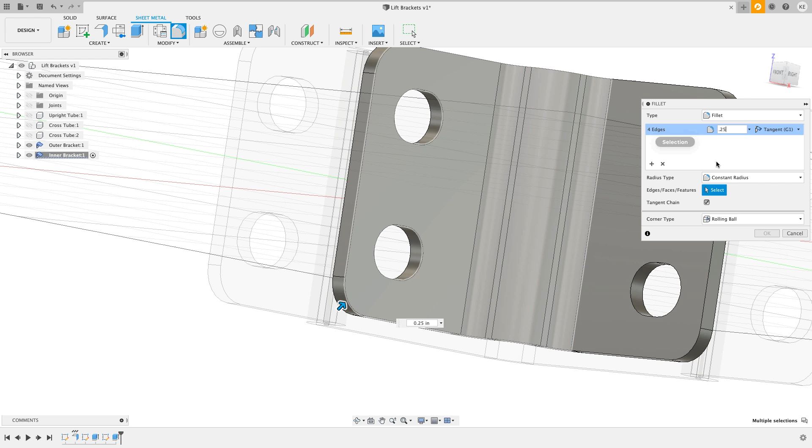I'm going to turn on the visibility of my other components, and the last thing I'm going to do as far as design goes is to lock this thing in place.

I'm going to revert it back. I'm going to do an as-built joint between that bracket and the tube right there, and I'll hit OK.

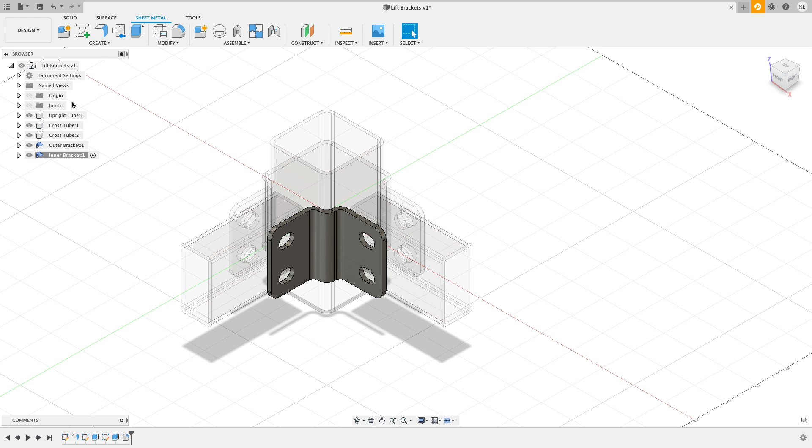Now everything in my design, let me grab the top, nothing will move. Everything is good to go.

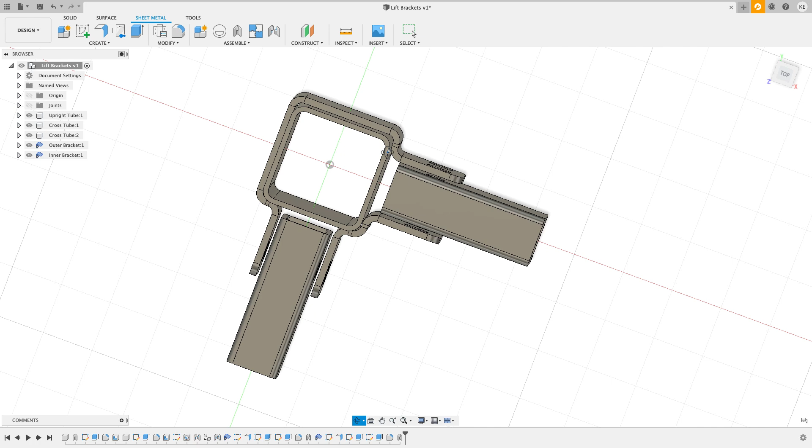So that is designing the inside and outside brackets. You can see I've got roughly a total of 1/8 of an inch of gap on both sides when it's all said and done. That should be more than enough for this design that I need to do. When I put the bolts through and tighten this down, this is going to suck everything into place, so that will be good.

If I wanted to look at my flat patterns, I can activate this part. I'm going to right click on it and say isolate so we just see it. Expand this out, and now I need to create a flat pattern.

So I'm going to choose to create a flat pattern. I'm going to choose that face right there and hit OK, and Fusion's going to flatten that out for me. So that's what the bend lines would look like on this particular part, and I can finish up that flat.

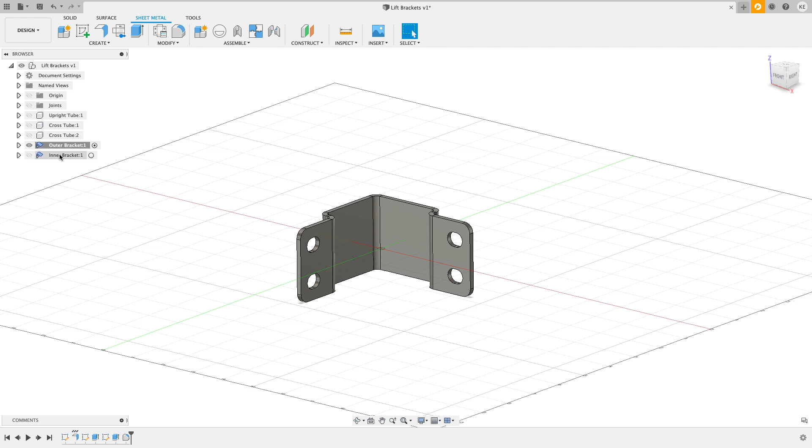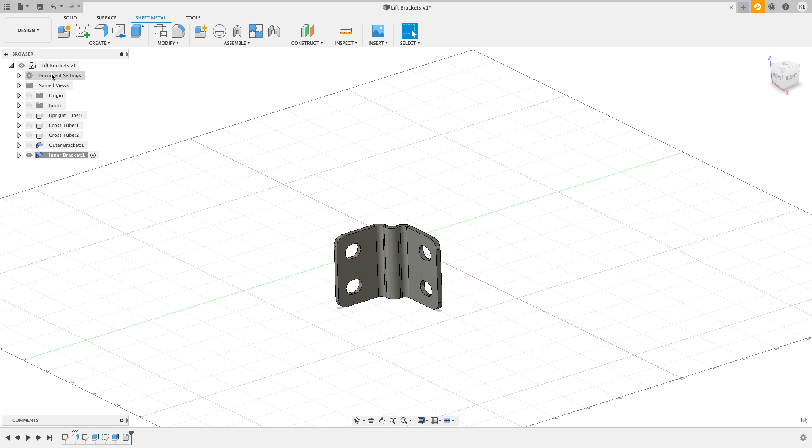Now I'm going to activate the outer part and do the same thing. It doesn't really matter which face we grab here per se - sheet metal rule, I'm sorry. I'm going to click on the flat pattern and click on that face and hit OK, and there's the flat pattern of my other bracket. I'll finish my flat pattern and I can activate my top level design and turn the visibility of everything on.

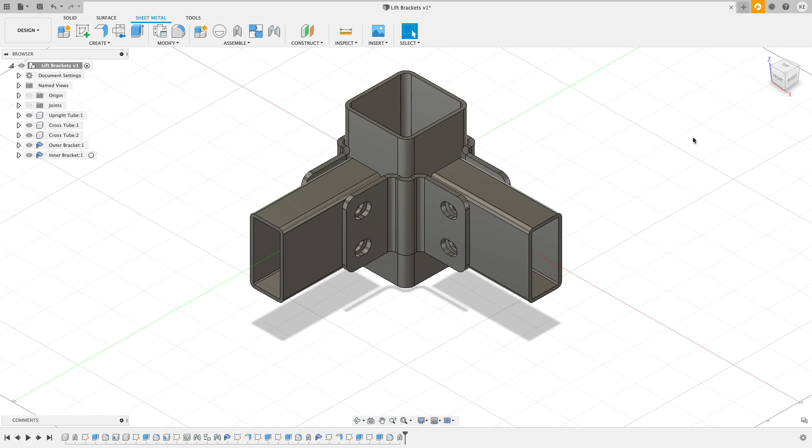Now what I think I'm going to do before I send these out to have these actually fabricated, I want to make sure that they fit. I've got a 3D printer. I'm going to print these two brackets on the 3D printer and see if when I take them out to the jet ski bracket - I'm sorry, the jet ski lift - and put them on, will everything line up and will it all bolt together? Hopefully I'll be back with a little picture or video of that process.

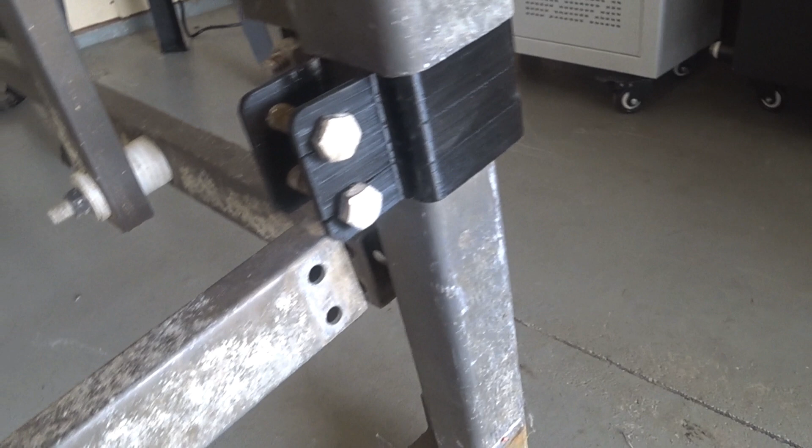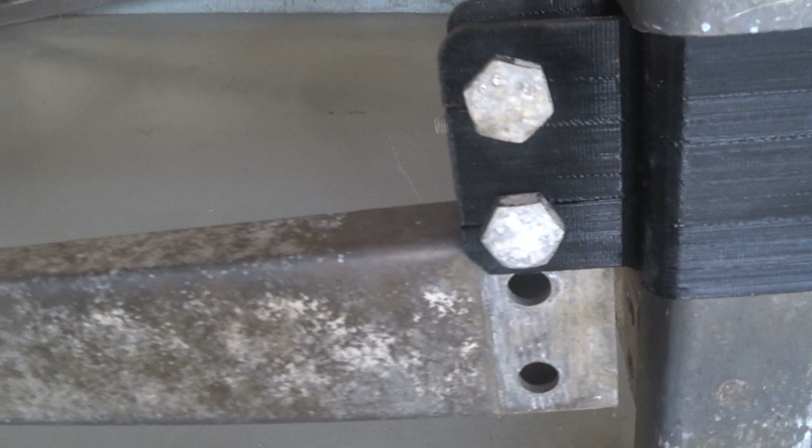Okay, I got the 3D prints made and they're functional enough to test. You might be able to see I broke it a little bit trying to connect this bar up there, but basically I'm pretty happy with it. It looks like it's going to line up and the holes are in line enough that when it comes together I'm pretty dang confident that when I get the sheet metal pieces back they're going to line up just fine. So it looks like this is going to work out pretty well for me.